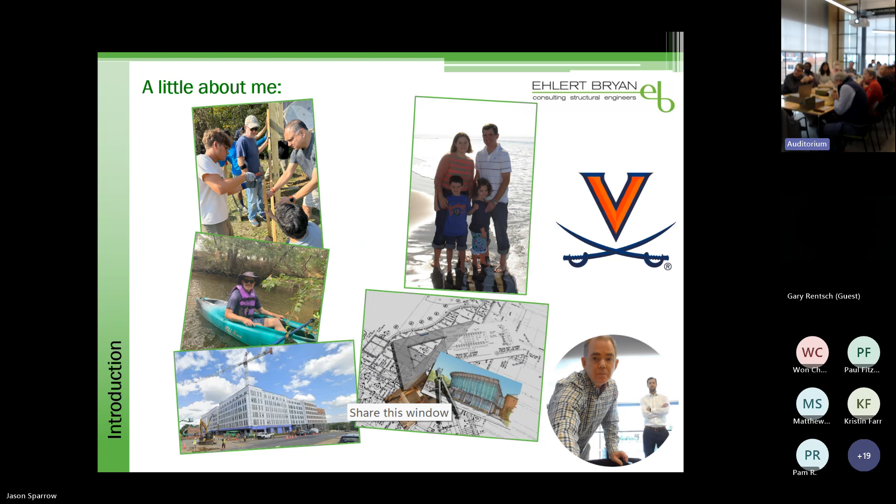A little bit about me, I have 3 kids and happily married. My kids keep me busy during the day and keep me awake at night, so I look forward to when they go to college and I can sleep again. One of my hobbies is I really enjoy baseball, and my son got into baseball and I got to be his coach for the last 2 seasons, so that's really big time one of my other things to do outside of work. And then the picture on the lower left is one that Jason and I both have on our slides, the West Falls Church project. We've worked on that project with you all, and it's been a great experience.

So Ehlert Bryan was founded in 1981 by Wayne Bryan and George Ehlert. Wayne is still around working in our Virginia office. We do all kinds of structural engineering projects, buildings, any type of building you can probably think of, we've probably done it.

We're about 42 people now. We have our main offices in Tysons, Virginia, with about 30 people there. Then we have a Washington, DC entity with the CBE, about 5 people there. And then we have a new Orlando, Florida office that we opened about 2 years ago, with 3 people there now.

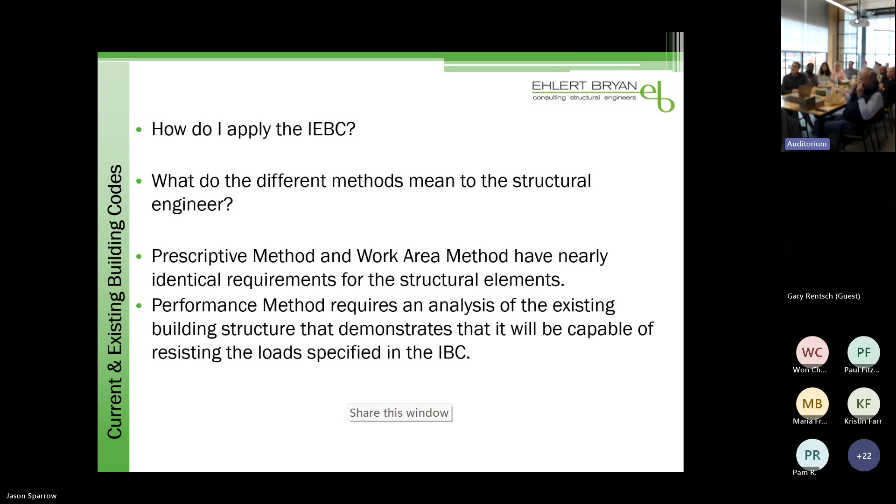So those first two methods, two thumbs up. The third one, I would hesitate to recommend.

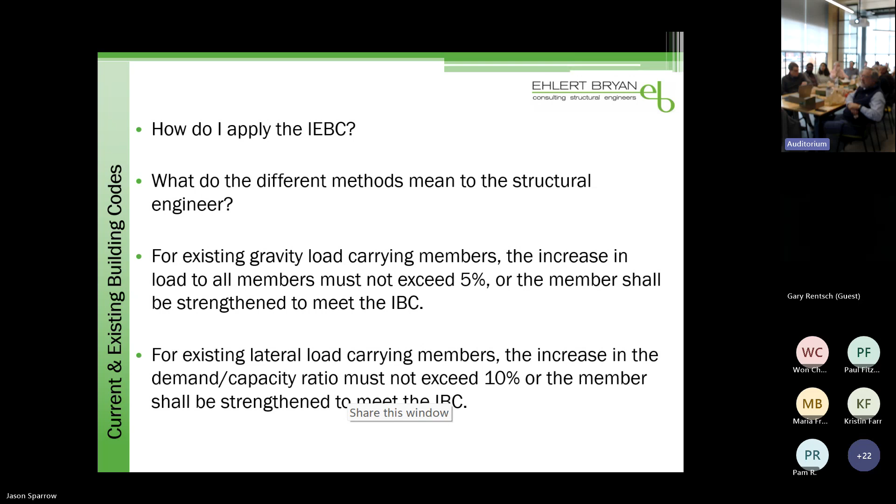For the structural engineer, as long as you're using those first two methods, if you're evaluating existing gravity load carrying members, there's a 5% change rule. If you're increasing the load or increasing the demand capacity ratio by more than 5%, it kicks you to the IBC. If you're less than that, then it's okay, you're good. Similarly, for lateral load carrying members, brace frames, shear walls, if you're increasing that demand capacity ratio by more than 10%, it kicks you into the IBC. If you're less than that, then you're good to go.

I'm not going to say this is exhaustive, but here's a couple nuggets for the architect. For the prescriptive method, one chapter, everything's in chapter 5, so that's nice.

If you're doing alterations, all the new stuff has to be IBC requirement. The existing building says it must not be less complying than it was before. So if you're changing the use, that might be an issue. But if you've got an office building and you're modifying it, you just need to make sure that anything you modify is improving the situation, not making it worse.

It probably will require a sprinkler system to be added. That seems to be pretty consistent. And then there is an exception for stairways if they don't meet the riser and tread dimensions that's in the IBC, and you don't have enough room to modify that stair. There's a grandfather clause for that.

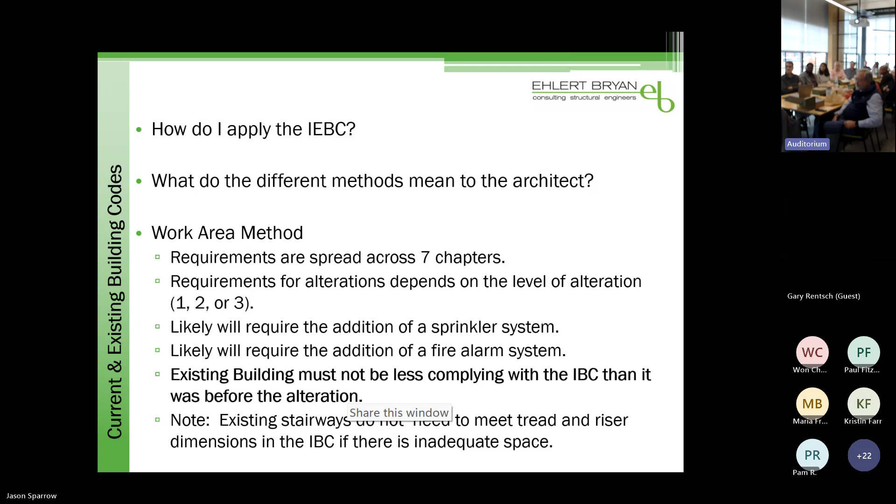So that last method, the one I give two thumbs down, the performance method. It's all in one chapter again, chapter 13, unlucky 13. It's basically a scoring system that you evaluate for fire safety, means of egress, and general safety, what they call it. You go through this whole thing, rate each of those categories.

There's a whole table in the end, and you need a passing score. If you don't pass, you figure out a way to change what you're doing to get a passing score. I think there's more flexibility to figure out how you want to change and create that passing score. But it's just a lot more complex than either of those other two methods. So that's the performance method.

And of course, as the structural engineer, he has to basically use the IBC to evaluate the existing building. If you have a nice set of structural drawings from the original building construction, your structural engineer might be able to do that. Could be a lot of work still, but you can do it. If you've got a historic building and you don't know what's behind the walls or how the concrete is reinforced, that's very difficult to do.

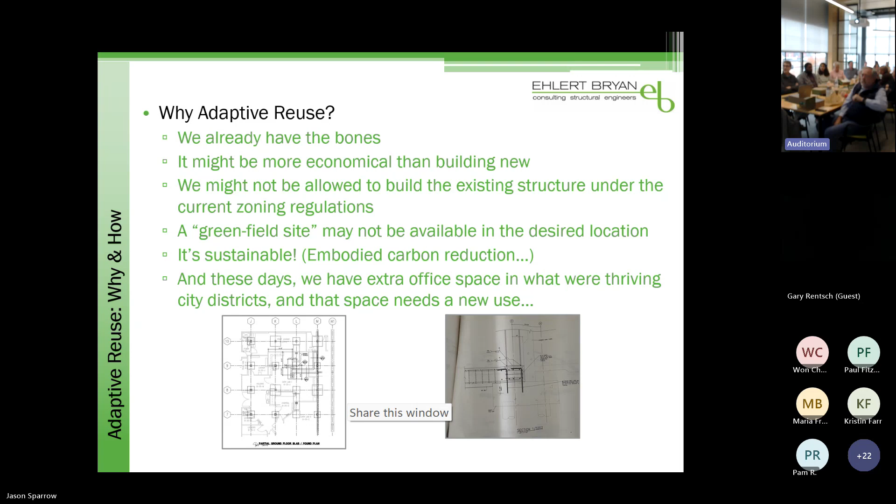A benefit is certainly that it's sustainable. Again, if done right, it can be a lot more sustainable with a lot less embodied carbon than a brand new building might be. And nowadays, with this big change—we'll get into it more—we have so much available office space. It's not being used like it once was.

There can be tax credits and other financial incentives for developers. There's certainly marketing benefits for the appeal of a historic building. And we call it excitement benefits, where locals might be really proud to be a part of that building. They want to live in that building because they've seen it or it has some meaning to them. So it obviously can be faster if done right, depending on what you're doing.

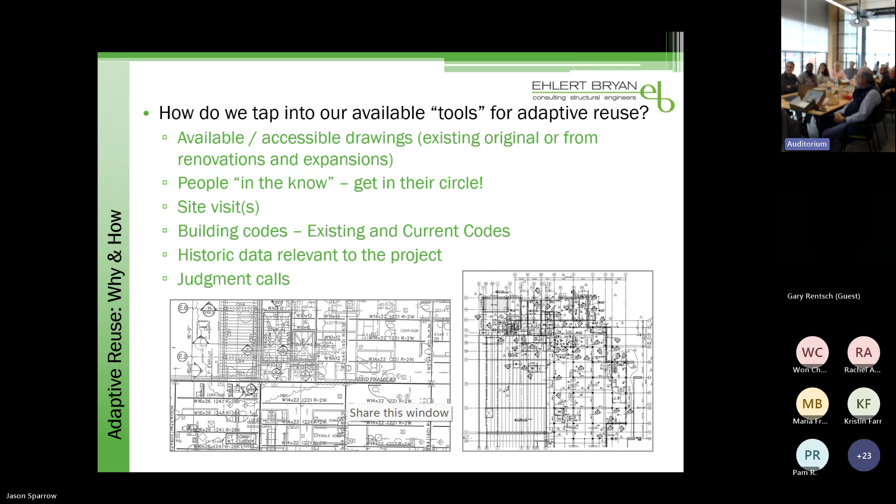Historical data - if it's a certain type of system, we might know that system acted in a certain way, or it was designed to a certain standard. That can tell us a lot. And then my favorite is judgment calls. There's just a lot of judgment in these buildings.

So my soapbox for existing drawings: search. These drawings are so important to the project, and I can't tell you how many times we say, hey, are existing drawings available? No. Okay, are they really available? No. But really, are they available? And then we find drawings. So we have to just keep digging and be creative.

Don't just say, okay, well, I don't have them handy - what about permitting records? Maybe we don't have the original plans, so we have plans from a renovation that was done a few years ago, and that would tell us more information. A lot of times in this area, it's a small world. We might know the previous designers, and be able to call them and find out information. I mentioned maintenance offices and storage areas.

They may be hidden. Quick story - this has happened to me on two jobs recently. One was a renovation of a church, and the other was a renovation of an older restaurant. In the restaurant in particular, I was crawling around, and we'd ask a million questions: are there existing drawings? No. So we're doing the site visit, and I'm there with the architect, crawling around. We're up in the ceiling, measuring all the stuff because we don't have any drawings.

And finally, it's kind of in the back kitchen area - there's like a little storage room, and I'm back in there. Then there's a little platform - it's a little sketchy, but I climbed up there because I wanted to get up in the ceiling and see what I could see. And sure enough, there's just a couple boxes of drawings right there after I did the whole site visit. So we took that down and spent the rest of the time taking pictures of it, and we had our drawings. So anyway, you never know where they might be hiding from you.

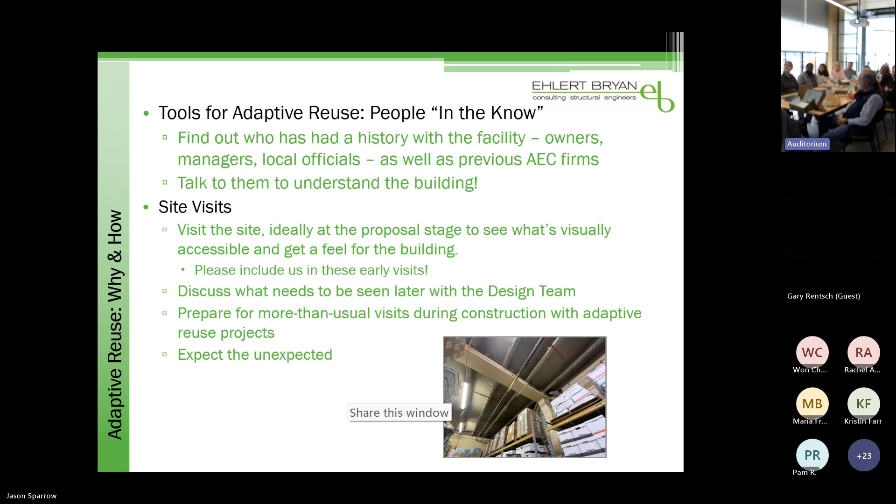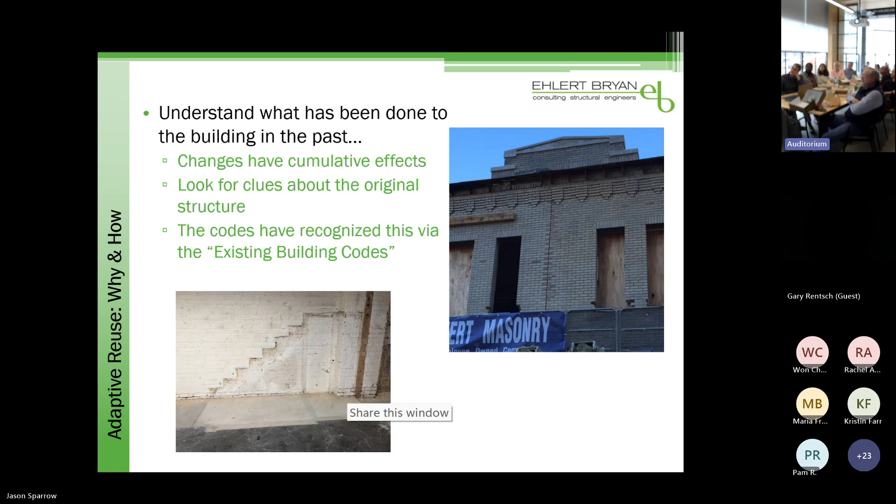So some more tools, the codes - I'm not going to go through these again, but as Jason mentioned, the codes can be very useful. Understanding and being familiar with what the code's going to offer you is very important. But specific to codes, checking the local regulations - sometimes a local jurisdiction will be able to help you a lot.

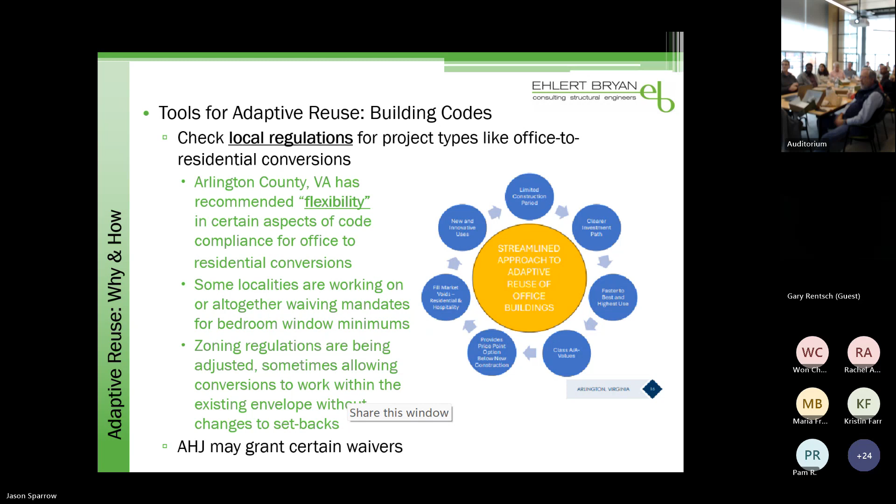Historic data - can you look through a simple Google search, or can you look through old photographs, or can you find, as I mentioned with codes, the previous code when it was built? That can tell you a lot. But like I said, my favorite is judgment calls - get creative.

We love to be creative, and I think most of us in this architecture and engineering industry love to be creative, and it makes our jobs fun. David, you were talking earlier about a simple flat plate construction that never happens in these types of buildings. There's no textbook answer. Everything is unusual or different, and it just requires thoughtfulness and creativity and thinking about, okay, what's really happening there? What can we do? What can we not do? What assumptions can we make that we can be confident in, but we can move forward in without being 100% sure of the answer.

And I like to say communication with contractors is huge. This is usually more on the construction side, but having a good relationship with your contractor, having a good contractor, hopefully, through these adaptive reuse projects makes all the difference in the world, because they're going to be out there every day seeing new things and seeing things that are different from maybe what you assumed, and having that open line of communication.

And a lot of times when we don't know the answer, we can put assumptions on the drawings. We think this is a 12 by 12 concrete element, verify in field. And if it's not, okay, then we'll adjust. That's a way to communicate with the contractor.

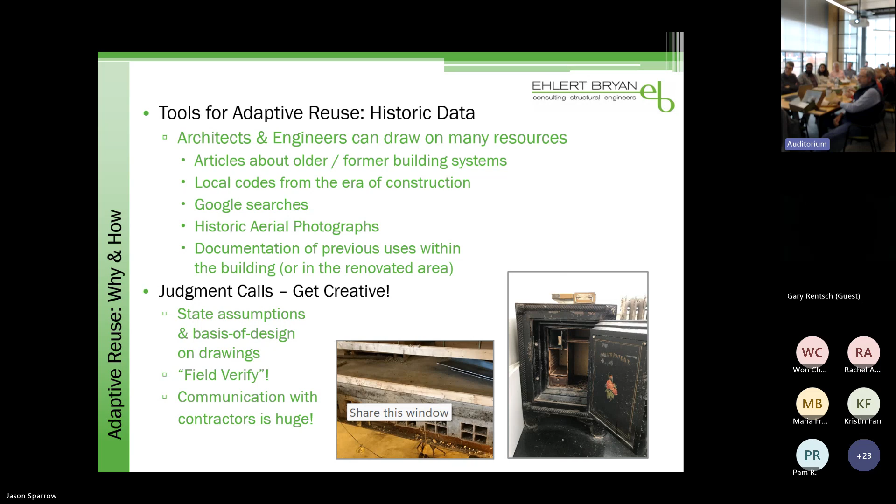But a lot of times, it's some selective demolition. Sometimes it's as simple as that. We're going to cut a couple holes in the drywall and see what we see, and then we can extrapolate that information, to be verified later.

And then there's destructive testing of the actual structure. So sometimes I mentioned cores. If you have a concrete building, that's often needed to understand the strength of the concrete. There's also rebar sampling. You can take some rebar, and for structural purposes, the tension of the rebar is what's most important. So we can take it to a lab, make it fail, and understand what the capacity is. And then there's the historical data. Based on the test results, that can clue us into, okay, this was probably built to ASTM whatever in 1965, and the strength you can assume is this. Allows us to make better educated guesses, educated assumptions.

And structural steel, you can do the same thing. You call it coupons - you find a place in a beam that's not super important structurally, cut a little piece out of it, take it to a lab and stretch it, and that will tell us a lot. There have been several jobs where that's been really advantageous to us, because we've assumed a beam has a certain strength based on its age, when in reality it has a significantly higher strength. Using that higher strength, we can get away with doing the work with less cost.

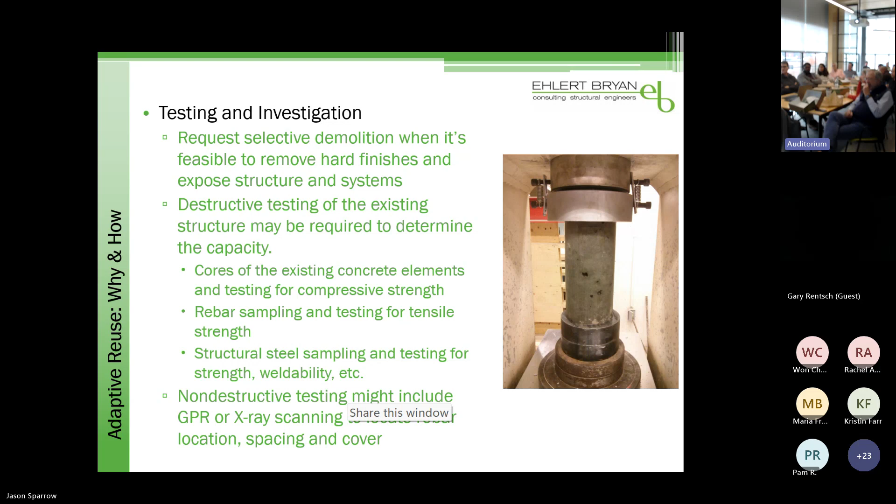And then there is non-destructive testing as well. I'm working on a job right now where we're doing this. You can take GPR X-rays, and say you have a concrete slab and you don't know what the rebar arrangement is - you can scan it and understand the spacing. I might chip a few little spots and measure the size of the bar. You can do different things like that that will tell you a lot. The scanning can also tell you the depths of the different elements. So a lot of times after this initial site visit, and after the job is starting to move, it's a good time to talk about what kind of testing can we do to get more information on the buildings.

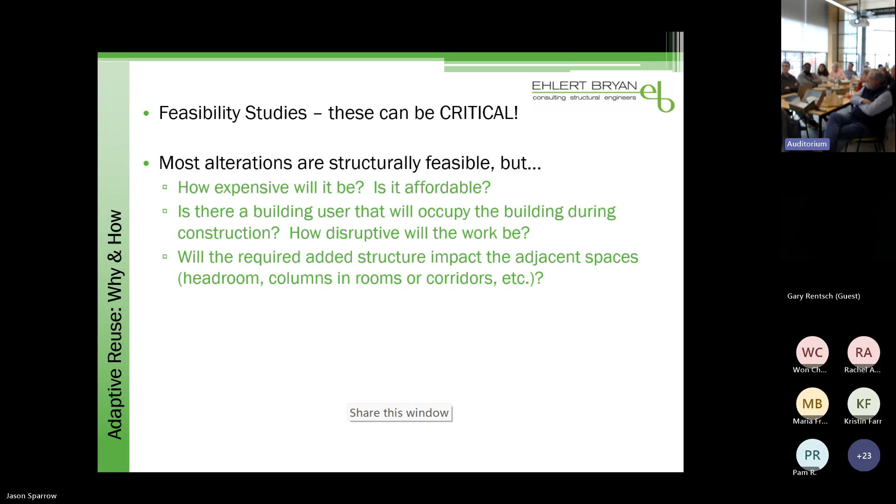And then feasibility studies - these are often a little bit of extra cost, so maybe a little more time, and maybe the owner is really ready to get moving on the job. But these can save so much time down the road and be so beneficial. From a structural perspective, what kind of strengthening are we going to do? What's the impact? When we cut a hole here, is it okay if we just do that, or is it going to require that we add shear walls and brace frames, or do something very big? Sometimes we don't know that until we spend a little time doing analysis. And I know it's the same architecturally - what are some of the structural depths? Is that going to work with the head height we have? What are some options that we have?

We have an example here - this is a building in Georgetown, the British International School. We just went through it - I believe they wanted to take the existing roof and make it a nice finished space and amenity area. And it sounds great, love it. And unfortunately, this is not a success story, because we went through the feasibility study and it was determined it was just too cumbersome.

This was on top of the existing building. We've seen this a lot where the roof is designed for rain and snow, and now we want to add rock on top, and it's a big deal structurally. Sometimes roofs have reserve capacities where maybe you can handle that, other times, in this case, it did not. There were also architectural reasons where we had to extend the stair and elevator up to the roof.

I think some other things made this a case where having the feasibility study up front saves a lot of time, effort, and cost. Otherwise, this would be something to learn the hard way.

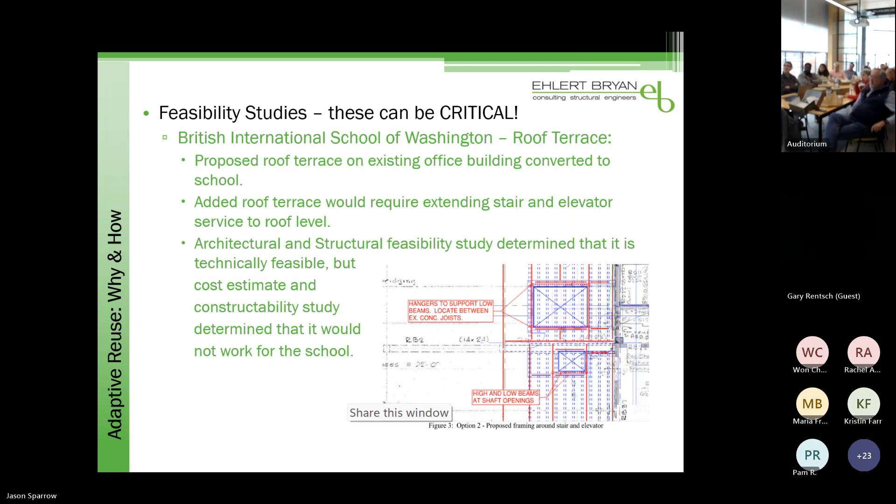It's important to coordinate with all the disciplines. It's easy for us, as structural engineers, to get into our silos, and it's easy for the MEP teams to get into theirs, but especially in adaptive reuse, it's so important because there are just so many additional things needed. If we're adding rooftop equipment to an existing building, let's get a little more creative than just plopping a big unit in the middle of the roof. Where can we put it that's going to help us structurally, or be the least intrusive structurally?

We're posting up with existing columns, and then we have some cantilever, working around existing MEP. It was a mess, but at the end of the day, that's what the framing plan looked like, and it allowed that change to happen, whereas otherwise it wouldn't have been possible.

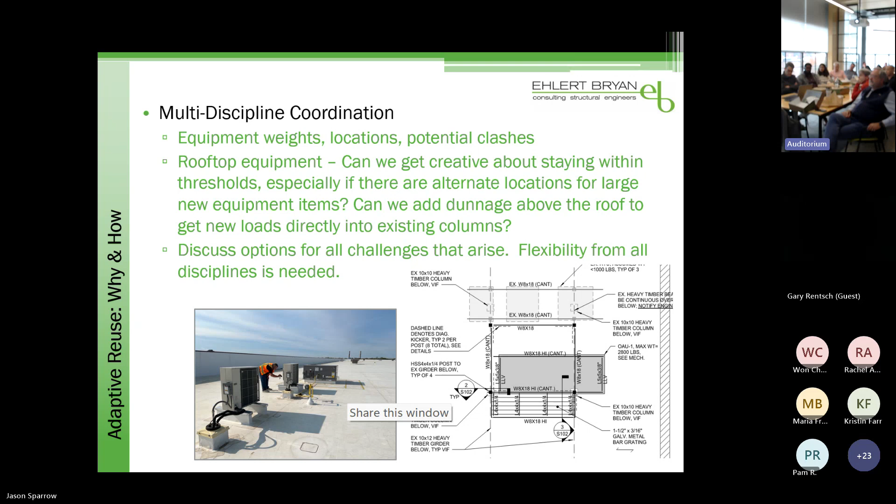I don't know how much you guys have gotten into sustainable design and studying embodied carbon, life cycle analysis, that type of stuff, but it is a benefit for these adaptive reuse projects, and it can be a real benefit to developers for a variety of reasons. I won't go into too much detail, we could do a whole seminar on this topic, but there is certainly a benefit, and we can help with that as well.

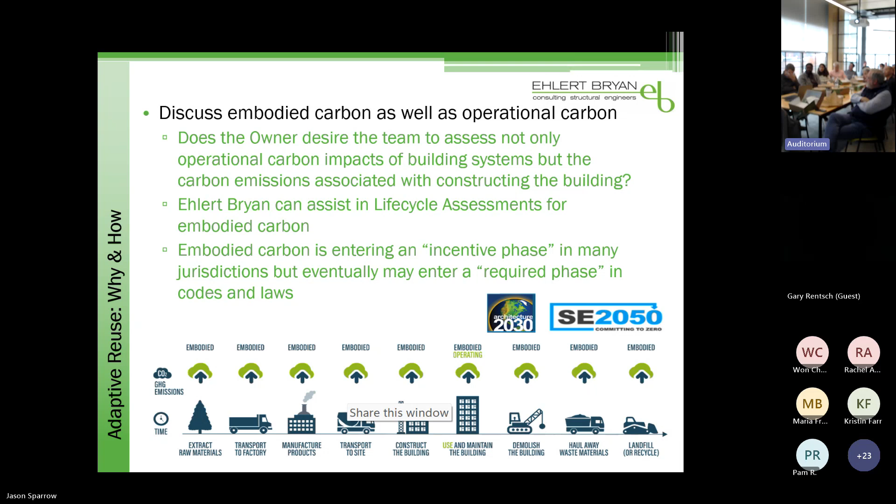We're part of, in the structural engineering world, what's called SE 2050, where we're committed to net zero by 2050. I think for you all it's 2030, so you're ahead of us by 20 years. But we can do life cycle assessments, make recommendations, and help with that.

Jason found this, which we included because we thought it was interesting. This 2001 L Street job had been purchased in 2015 for about 100 million, almost $99 million, and it just sold for 30 million. The purpose of that is just to show that developers can get a pretty good deal on some of these buildings now. Sometimes it's worth it, sometimes it's not, but there's certainly opportunity.

And there are many success stories, and we're going to talk a little bit about what's success and what's not. Not all office buildings are suitable for this, it has to be the right building. That's what we're going to talk a little more about - what is the right building?

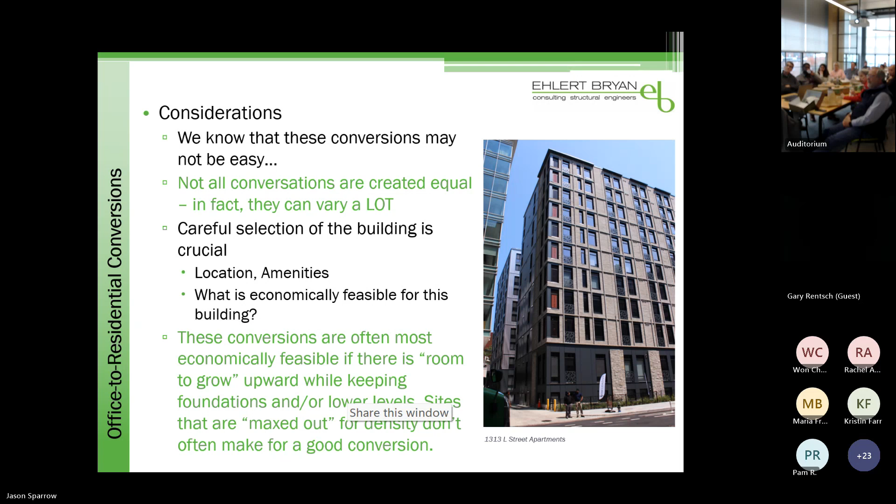So start with the opportunity - what's the good news about these conversions? Well, structurally speaking, the most obvious one is that the live load changes. Live loads are people, desks, furniture, all this stuff. For an office building it varies, but typically they're designed for 100 pounds per square foot. In a residential building, you're typically looking at 40 pounds per square foot. Now you do add back some partitions, some additional weight, but you might be pretty close to half of your design load.

And so that means the floors typically work well from a structural perspective. It also means the foundations - and this is actually more important - have a lot of reserve capacity. Even if you're adding back more floors than the building had, when you do the math, you might still end up with less total load to the foundation because of this live load change.

Now also, typically office buildings require more elevators, so you get extra shafts to use for MEP. That's a good and a bad thing, but for this slide we'll say it's a good thing. You have space to add stuff, and you have opportunities to increase your square footage.

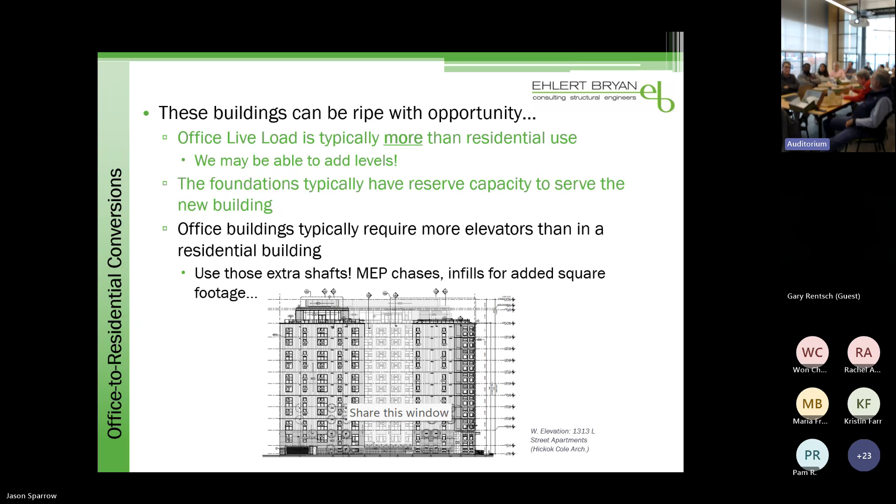And if you're adding floors, can the live load for those new floors be less because it's residential than it was for the main building? Right, you don't have to match it. So if you had 8 office floors and you went to 12 residential floors, the load might be roughly the same - I think the weights of materials and stuff.

Okay, so unfortunately I have more slides on the constraints than the opportunities. Offices have large floor plates, many of them do, and often there's not the requirement for having a window at every cubicle. So it's often hard - the perimeter works well, but it's hard to get light into all the bedrooms and all the units. So typically that's looking like we're going to be cutting holes in the building to get more light in.

LFRS, lateral force resisting system. So we say, you can remove bays, please talk to us. We can maybe advise on what bays are more advantageous or less advantageous to remove. But it often affects the lateral force resisting system, which is the building's ability to stand up against wind and earthquake and its own stability. So if you cut it in the wrong spot, even one small hole can make a big difference in building stability.

Typically, these buildings we end up creating, from you picture just a theoretical square, you end up making a C or maybe an H. That gives you the surface area you need for the window light.

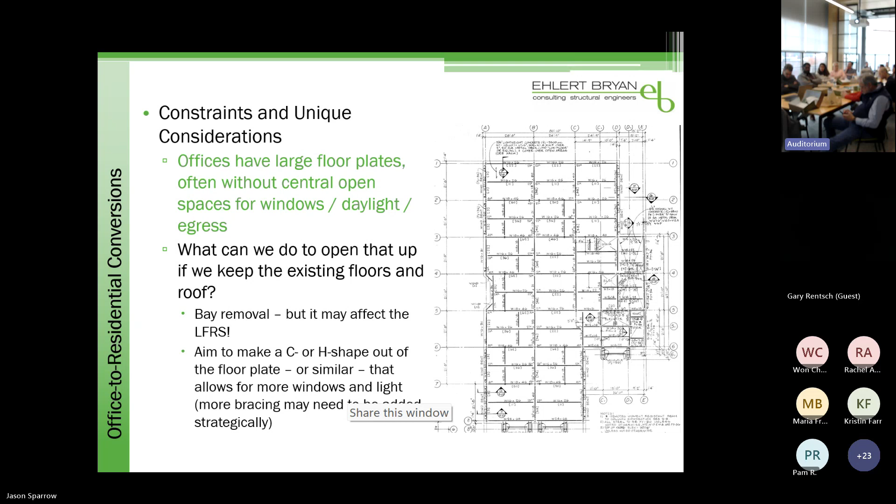Again, cutting up the floor plate like that does affect more than just that particular floor. It affects our buildings, so sometimes we need to add back in some bracing. Maybe it's the X braces that you see, or maybe it's the masonry walls and concrete walls to stabilize the building.

Additionally, I mentioned that there's more elevators and stairs, but often they're not in the right place. So often these buildings, this change triggers a code issue from an architecture standpoint, from an egress standpoint. So typically, we're adding new stair shafts throughout the building. Sometimes they're on the outside, sometimes they're cutting a hole through the middle.

And are we serving the roof? And what are some of the things that we can do creatively to get the right access to all the units, as the unit layout is obviously different from the office layout?

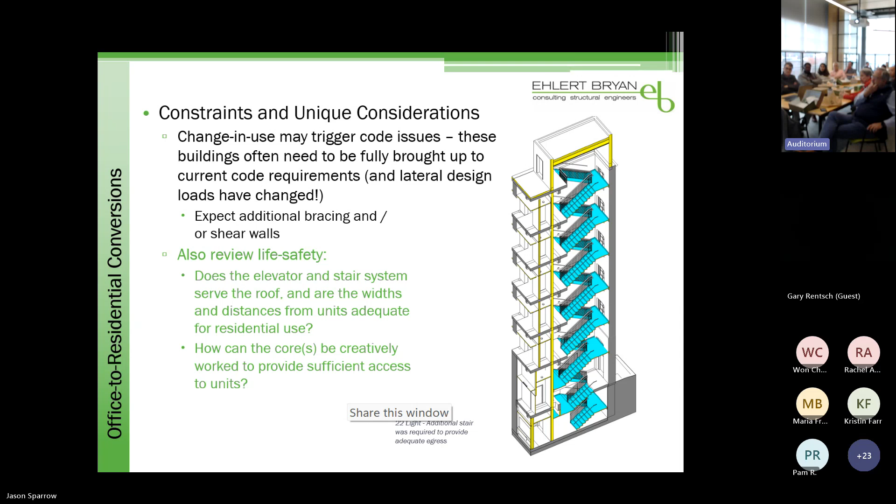So this is an example, and at the end we're going to give a couple other examples of projects we've done, but thought now would be a good time to share. This is 22 Light Street in Baltimore. It was a smaller project, but it was a successful office-residential conversion.

So I mentioned the light. We cut out, on the picture on the right is the after. We cut out a shaft in the building and got some more windows to those units. The notch, yeah, this notch right here. And then you can see the stair shaft popping up above the roof in the back. That was a new stair shaft run down through the building, which enabled that to happen.

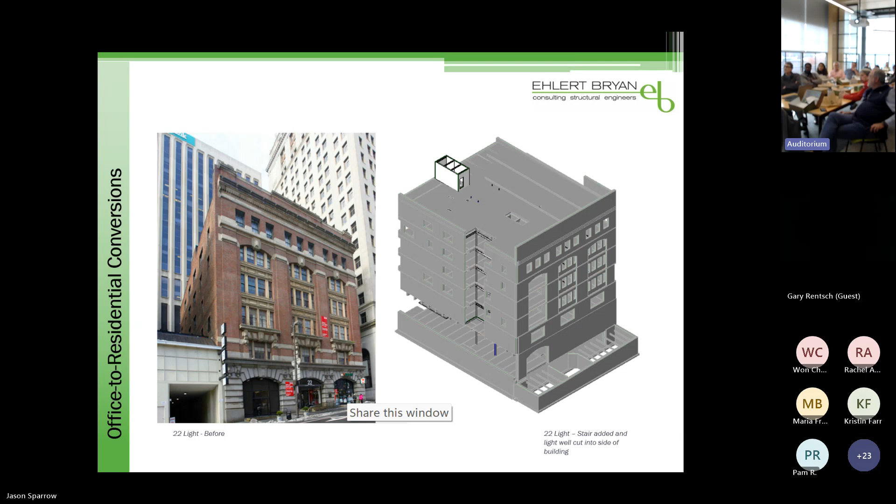So in this case, it wasn't overly reduced. Sometimes the cutout is a lot bigger than a small notch in the floor plate.

Another issue is the facade. You can think about an office facade, regardless of how it looks, it might not really be suitable for a multifamily building. And coming back with a heavier facade, if you want to add in brick, or if you want to add in balconies, or something that's a heavier system, the slab edge of the floor might not be able to handle that.

So we might be creating problems, so often we're coming back with a lighter system, maybe it's EIFS or something like that. So that's another thing with the facade—talk to your engineers and your whole team early on.

It affects a lot. The MEP and fire protection systems typically don't work for residential use in an office building, so almost always it's a complete redo of all the MEP systems. You have countless cores and shafts and different things you're dealing with associated with that. Again, that affects us, so it requires even more coordination between the disciplines than even a normal building does. We say study it early, because this is something that can really kill a project if you discover down the road that you have an MEP problem.

So in your facade comment about like for operable windows and things like that, residential—that's part of your facade messaging here. I know it's not so much a structural issue, but there are some exceptions for operable windows, depending on where you are, but yeah, that can certainly be a consideration. Yes, with the facade, it's also the weight—yeah, big part of it.

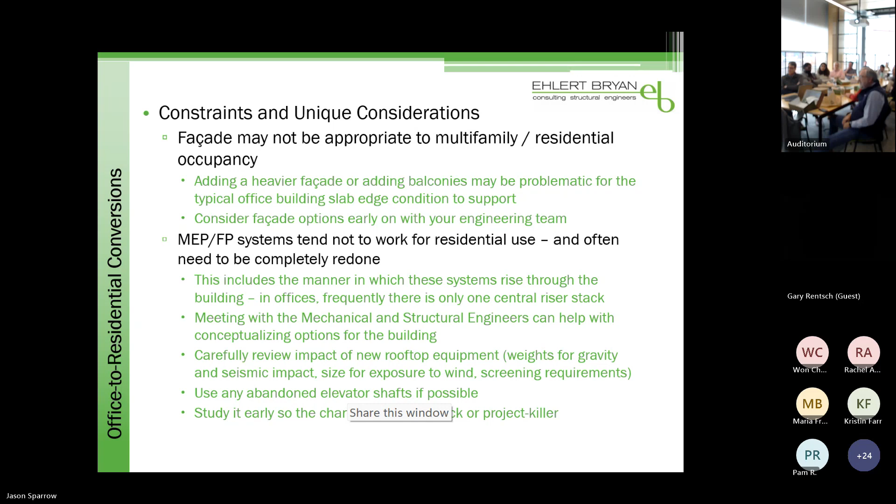Sometimes with modern elevators, you have this nice elevator shaft, but your new elevator doesn't fit. If you need a stretcher or have different reasons, the new elevator might be bigger. So talk to your elevator supplier and see what they can do - they can give you some flexibility.

And there's some flexibility too from some of the local jurisdictions. If they're incentivized to help you get this building built, and this is making or breaking the job, they might be able to help you out.

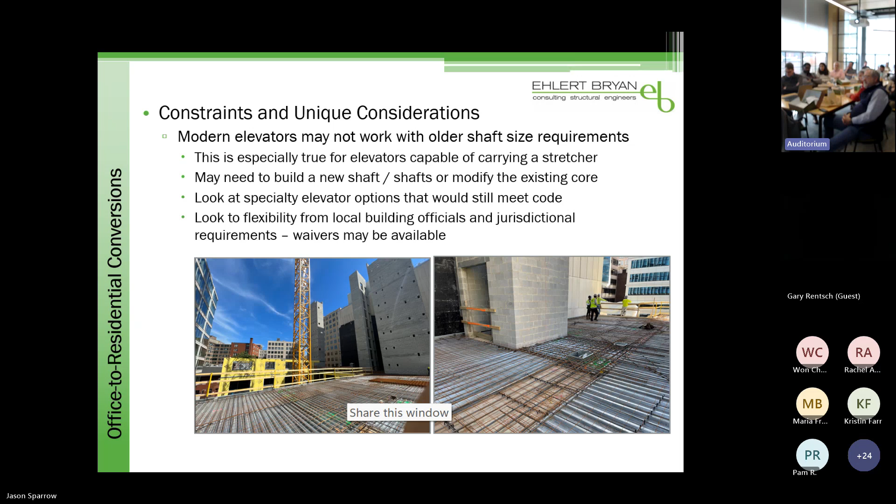One good and bad thing is existing parking in office buildings is more than residential. It's good because you have all this extra parking space, but the bad is what do you do with it - you don't want parking, the parking's not as valuable.

There's slopes for drainage or whatever else there is - different challenges. But I think you can get creative. We've seen some unique ideas with maybe some building amenities that aren't quite as high end being put in the previous parking areas.

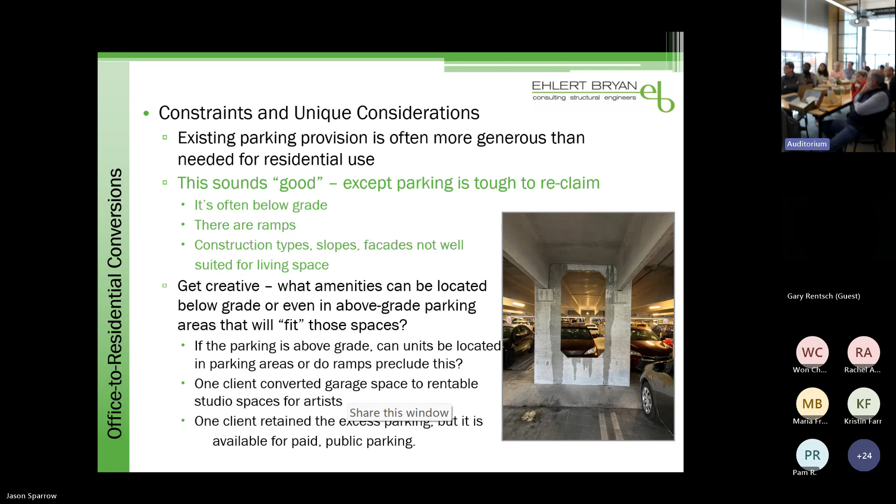We've also seen clients rent out that parking space and get a little extra income, either for adjacent buildings or for public parking. And we saw one actually rent out that space to some artists, who had different needs and were able to make that work in a former parking space. So you can get creative, but it's not always straightforward.

Another good and bad - the floor to floor height is typically taller. So if you're keeping the floors and not just knocking down and replacing them, it's good because you get tall ceilings, and I like tall ceilings.

It's often you don't get the density that you might get if you're building a new building, where you really max out, especially in a place like DC where you have a height restriction.

What's often done, because of the load benefits, you can typically reuse the foundations. What often makes sense in a place like DC is tearing a few floors down—maybe all of them, or just some—and then creating what we call a podium slab, basically a gigantic transfer floor where you can have a different architectural program above and below, or bearing walls coming down and transfer columns or whatever you need. With that podium slab, we can build up on the existing columns and then have beams, or usually a concrete slab span, carry whatever structural system is above.

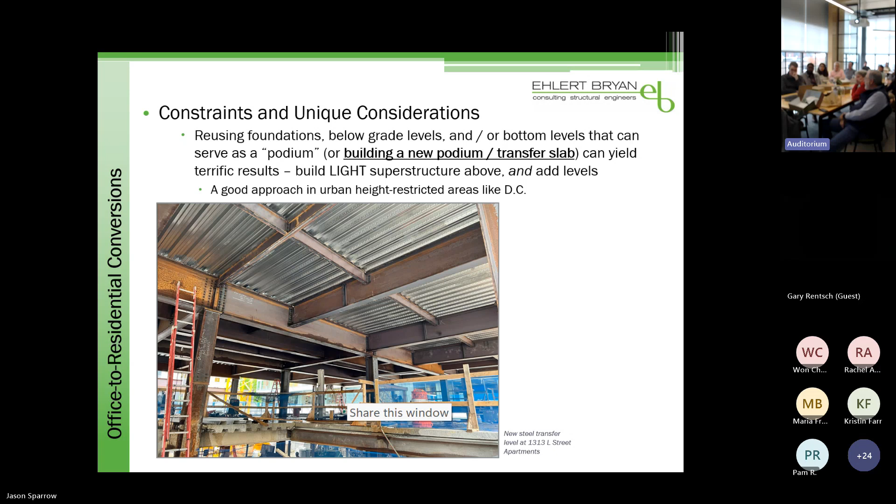Some options: if you're doing light gauge, you might have thin concrete slabs with a composite metal deck underneath, then joists or something else. Wood frame systems work if you're low rise. Mass timber is great—we've looked at many jobs doing that, but had a hard time seeing those actually move forward because mass timber is still kind of an emerging thing. It's a great opportunity though, because we can get the height the code allows. You can also do structural steel the higher you go.

I mentioned the loads, and sometimes rooftop amenity spaces can be added—if you're strengthening that roof, or adding a new roof, even though it becomes an extra floor, the foundation still might be able to handle it. The key is getting the loads back into the columns, which is why the transfer slab is important—we're not bringing loads down and changing the load path of the building, we're bringing all that weight back to where it was originally designed to carry it.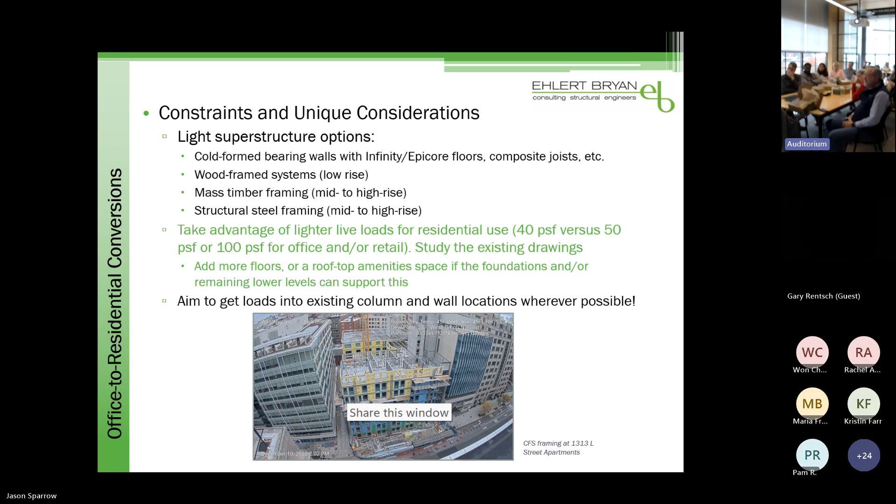So we want to run through a couple example projects—I'll let Jason do that. But before we go to the examples, I have a question.

On the project we're working on, some of the structure was deteriorated—metal decks, steel beams. You mentioned we had some assumptions about expecting this to have X or Y capacity, but what about those repairs? More so in this area, what have you guys seen about that? How do you tackle it, how do you budget? Ideally, you can do a survey before and get access to it.

That's the ideal. If you can't do that, it's really difficult to budget. We didn't have the ceilings out, so there was water infiltration in certain places where the deck was rusted through. There were places where columns were sitting in a concrete pocket and the facade leaked, and the column was sitting in a bathtub for the last 40 years. There was no way to find that unless you happened to drill your exploratory hole at that exact spot—so we had to replace the column.

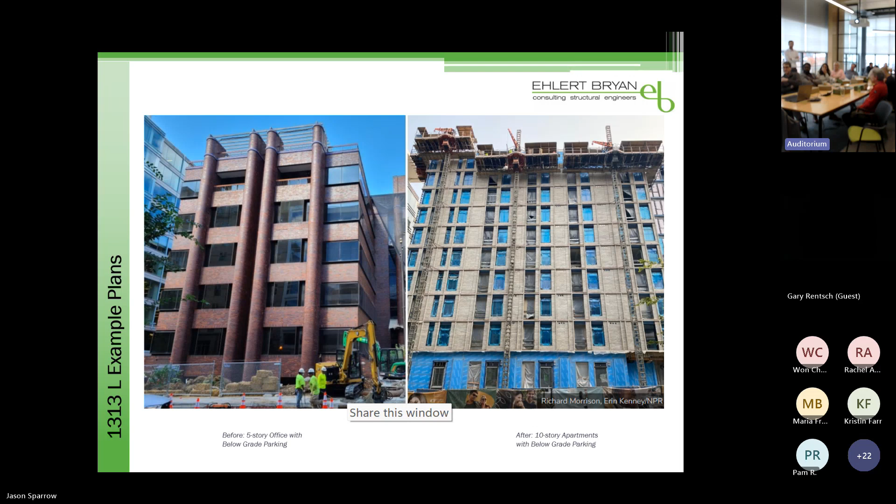Did you reuse the garage or parts of the building? Yeah, this is the P1 level, all existing steel frame. We made some modifications, but that all basically remained at that upper parking level.

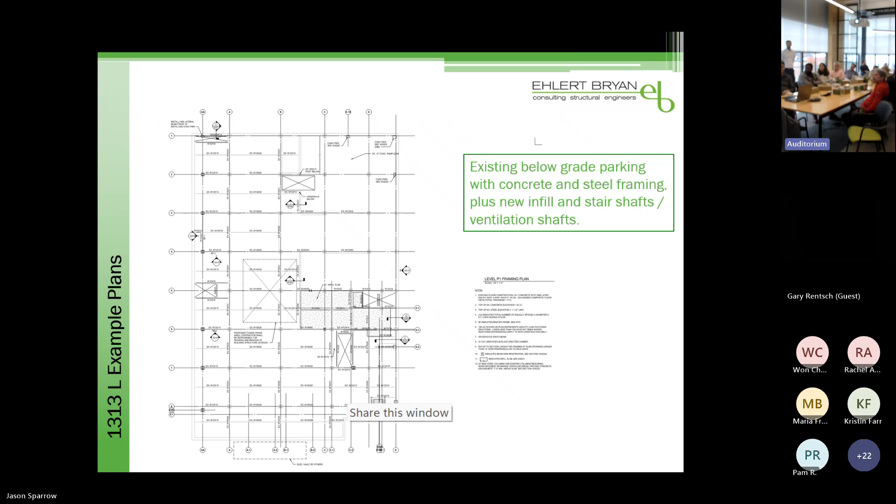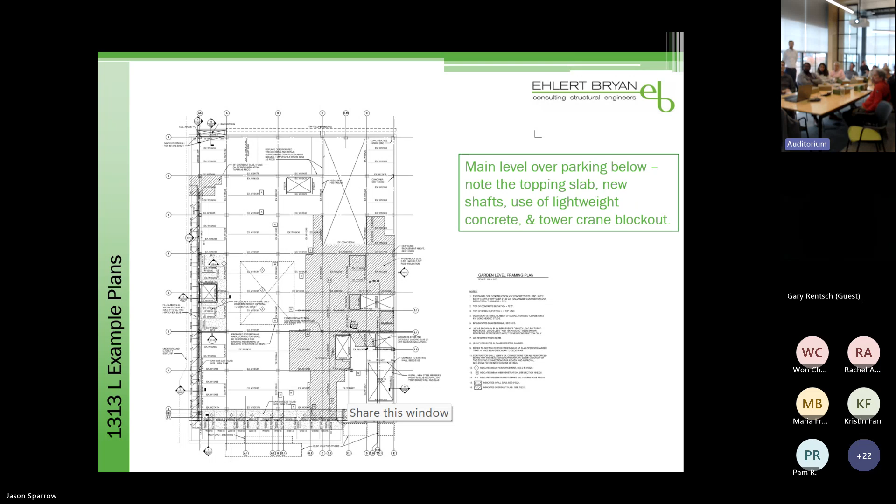Similarly, at the first floor, a lot of modifications were made, but this was an existing steel frame that essentially remained. Then, as Ben mentioned, the second floor became a transfer floor—this is all new steel framing, big steel beams. Above that was the C-shaped layout, as he also mentioned.

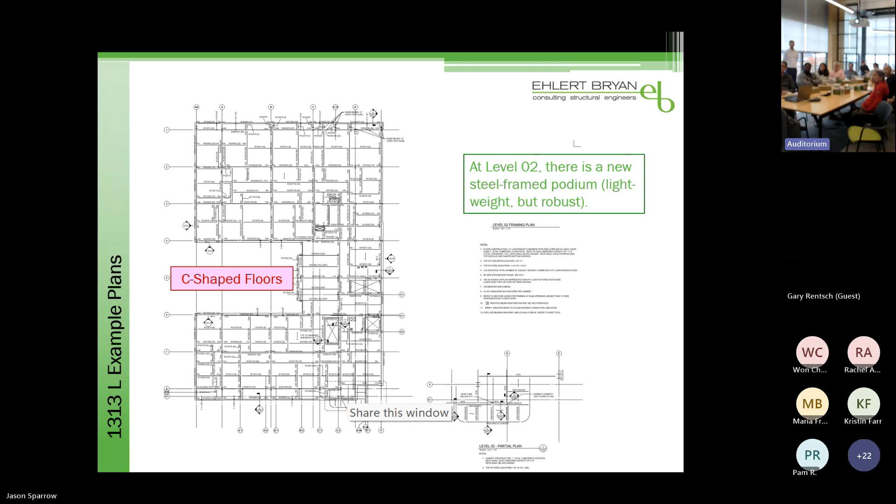Above that was load-bearing light gauge walls with a thin, I think 5 or 6 inch thick slab, Epicore deck, and a concrete slab, a long span system spanning between those walls.

The Epicore is again set up—it's a metal deck, a long span metal deck, so it's a shored system. It can span maybe 10 feet or so unshored, but typically with these unit layouts, we're just using the demising walls as load bearing, and they shore the deck mid-span while the concrete is poured.

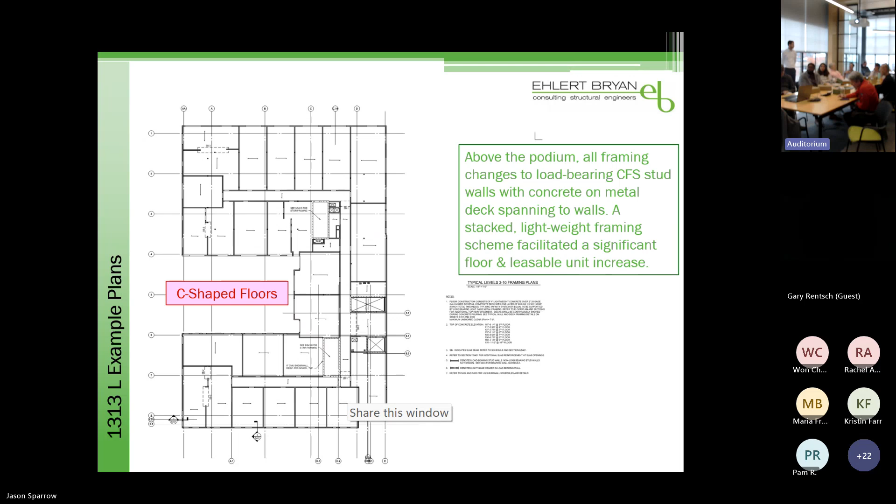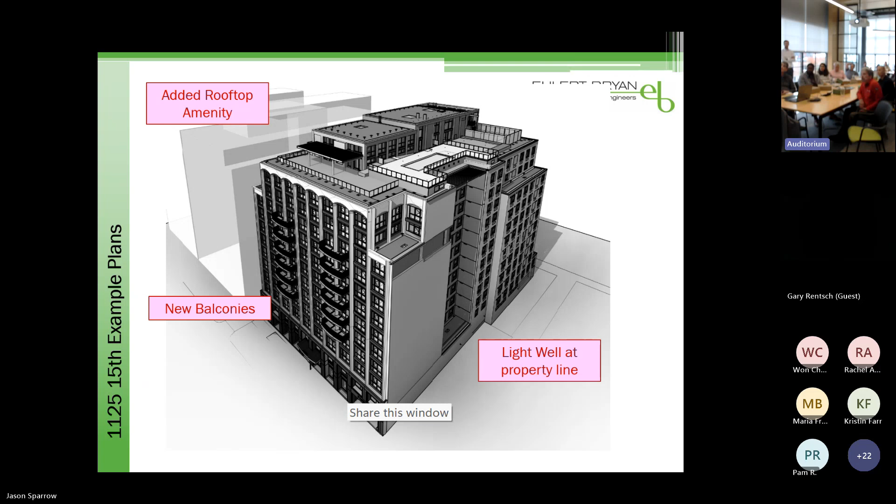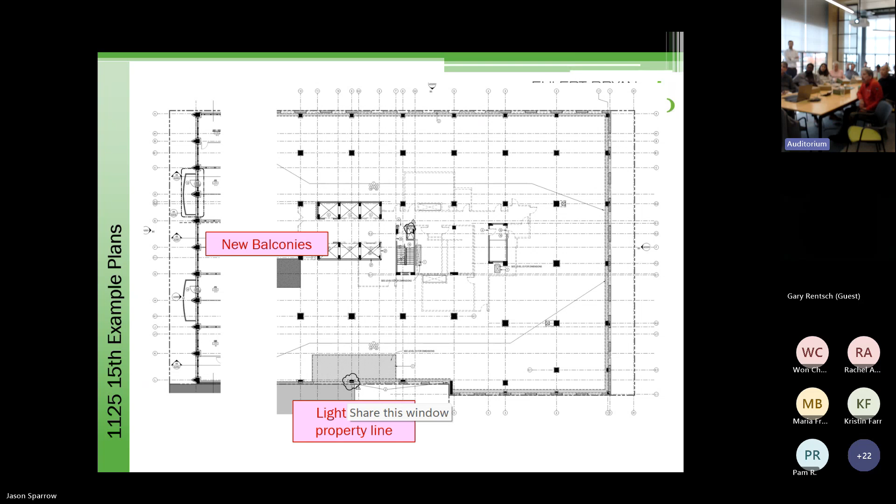The existing facade in place—it's just a plan view, the demo plan on the right and the new work plan on the left showing the new balconies. And this is where we demoed the existing slab to create that light well.

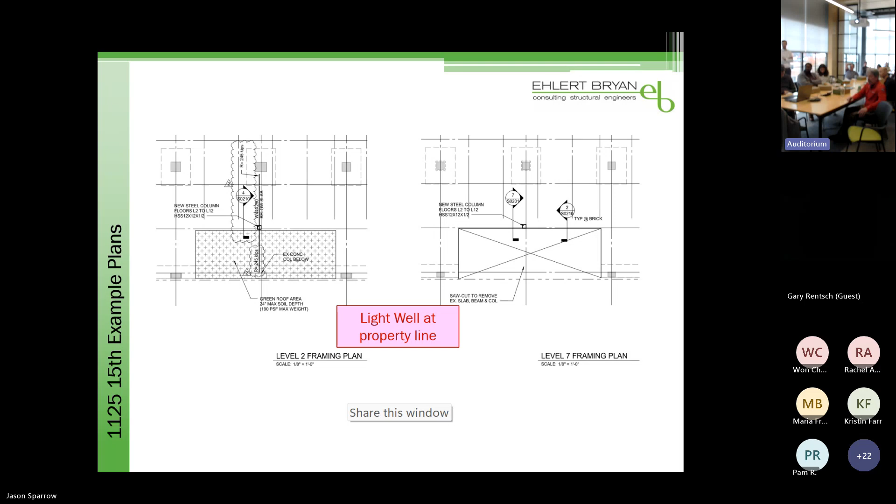Just showing some of the structural work—the level 7 plan on the right is pretty typical. We cut out that big notch in the concrete two-way slab, so we had to put a steel column in there to help prop up all those slabs. That comes down to the second floor where we've got a W44 by 290 steel beam that picks it up and takes it back to the existing columns. It's over the drive aisle down to the garage, so there's a lot of headroom there, and it worked out.

So just to summarize, there are opportunities out there for reusing existing office buildings that aren't being utilized for their originally intended purpose. We think there are business opportunities for architects and engineers to work on those projects. They're nothing new—they've been done for many years, but it's certainly a hot topic these days because of the amount of office space available and not being used. Like we said before, it's a sustainable way to proceed in downtown areas where you have existing buildings.

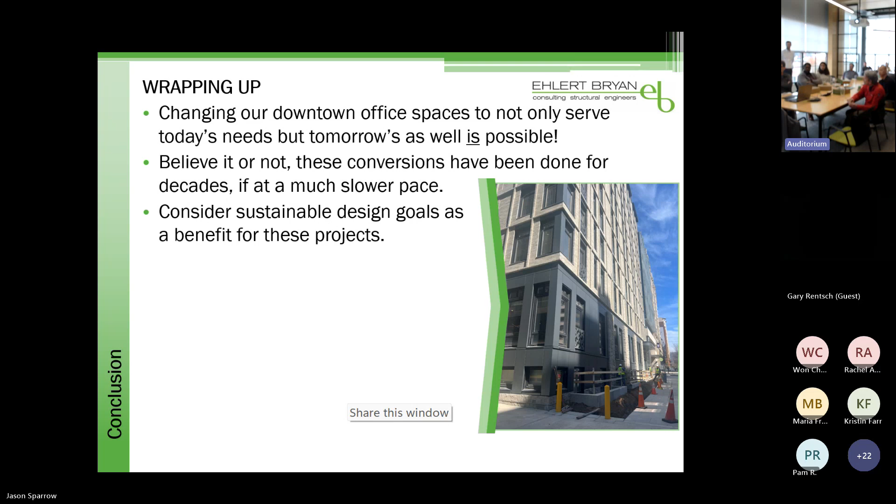We do have some knowledge about documenting what they call embodied carbon, and we can help with that if you guys would be interested.